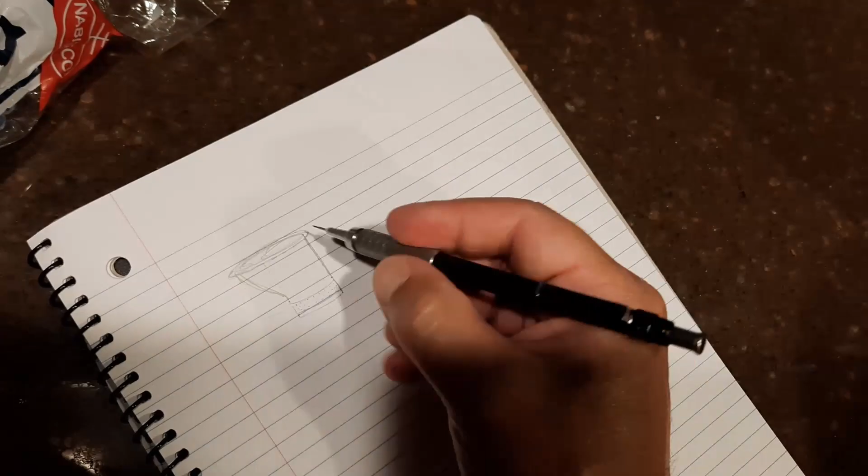First thing I want to do was get an idea of what the actual bowl or the toilet was going to look like. So I started to sketch out kind of how I wanted the shape roughly to be to make sure that everything would be able to funnel into one section.

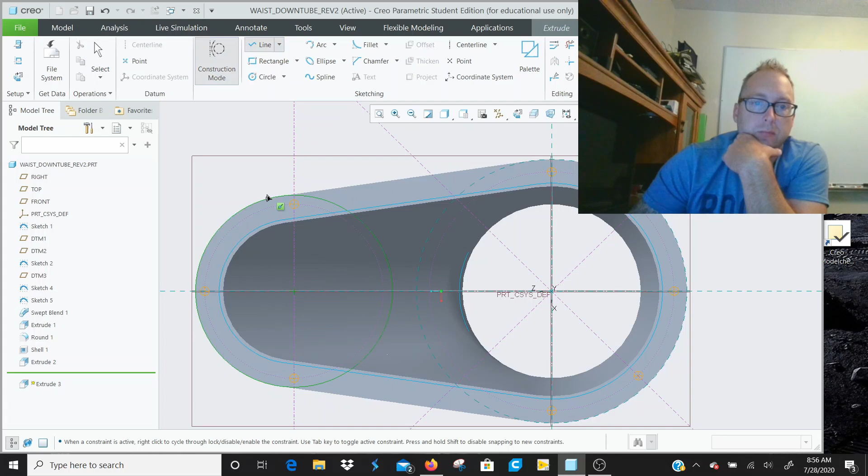So I already modeled the bowl for it, and so I'm going to go through and start laying out some reference lines and points where I'm going to be putting mounting screws to actually mount the bowl onto the main housing, which you're going to see modeling here up next.

So we'll go through, put some chamfers on the bolt holes so the screws can be recessed and everything can be flushed to make sure it all seals. Clean it up a little bit, round off all these edges, just kind of making it look a little prettier.

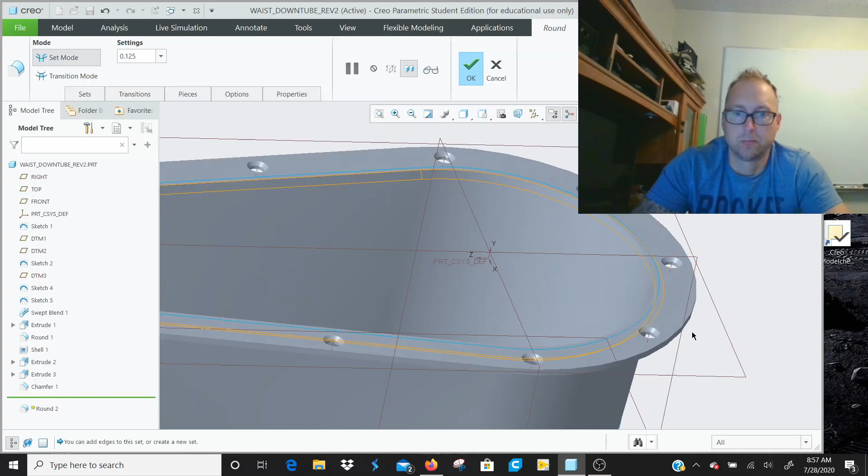Alright, so now I'm going to start on the main body. This is going to be the housing that all the components are pretty much going to sit in.

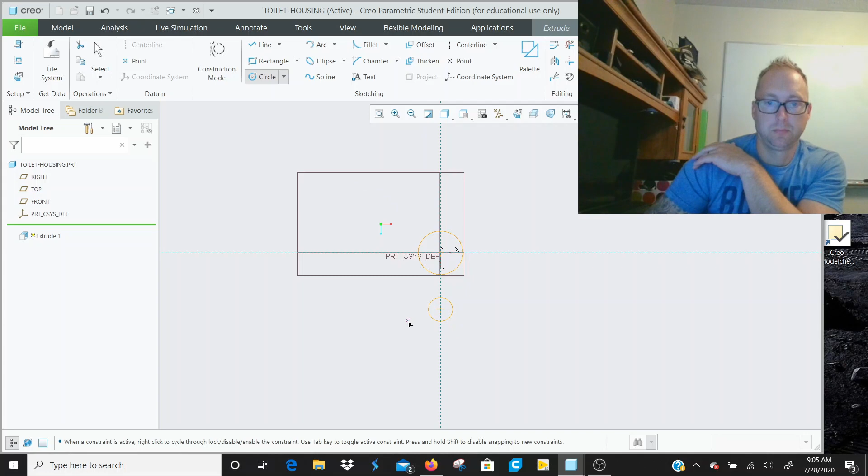So I need to go through, what I'm doing here is laying out what the bowl shape is. And that's going to be where the bowl, what I just modeled up, recesses in and sets into the main body. So once I get that size, I'm going to get all my other dimensions based on that.

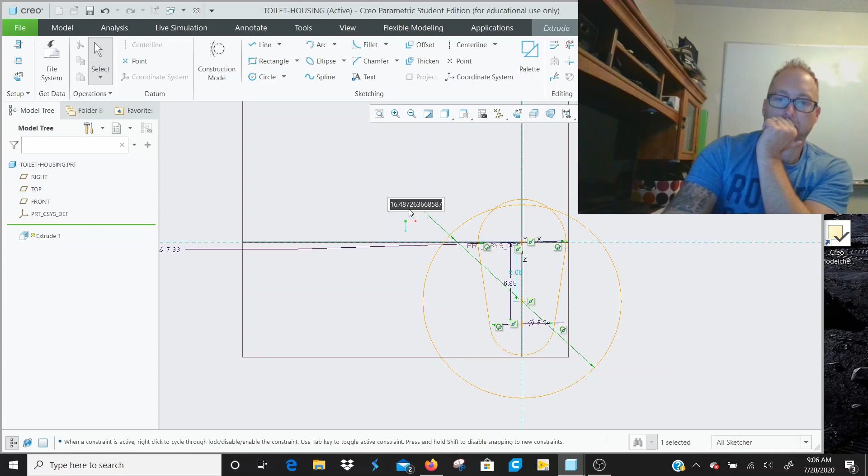To be honest, mainly it's going to mimic a lot of what a normal toilet on Earth looks like. Since we all know that everyone fits on those toilets for the most part, why reinvent the wheel?

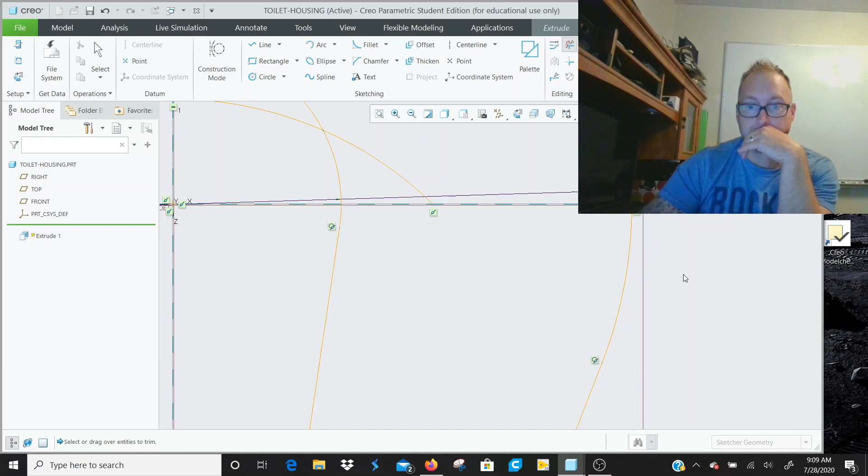So as far as dimensions and how it fits when we sit on it, there's no sense in really changing a whole lot. I did make it a little bit smaller so that I can make sure that I stay within that size requirement. So I went ahead and extruded it out.

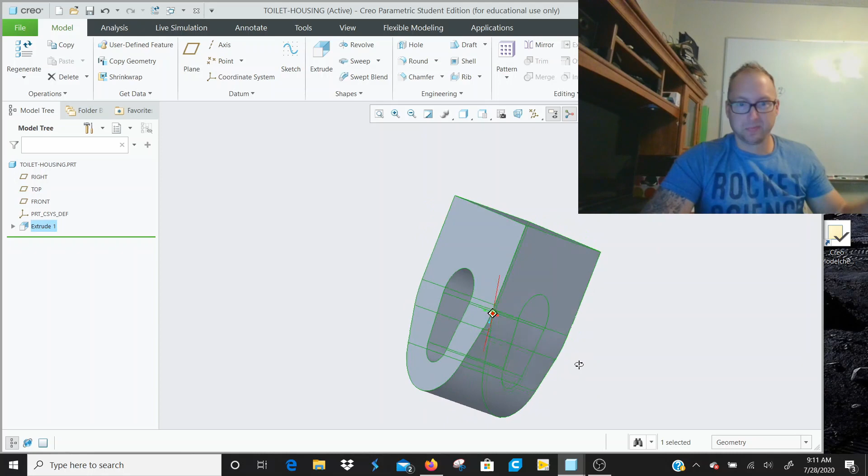What I'm going to do is I'm actually going to go back in and delete that hole that I made in this. And the reason I want to do that is if I go ahead and shell out this whole piece as it is, then I'm going to have a shell all the way down.

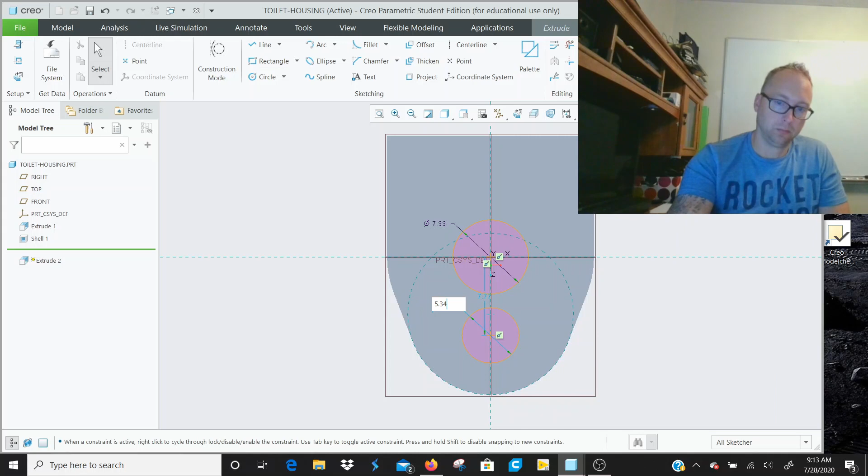So if I delete that, as you can see, I shell it out, and then I have one big opening shell that all my components can sit in. And then I'll go back in and extrude the hole out for the actual bowl.

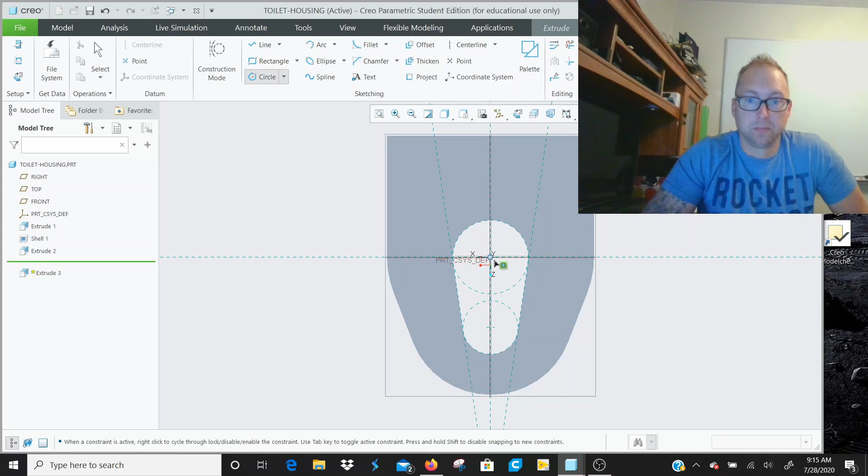Alright, so now that I have the hole for the bowl removed, now I need something to thicken the perimeter of that hole.

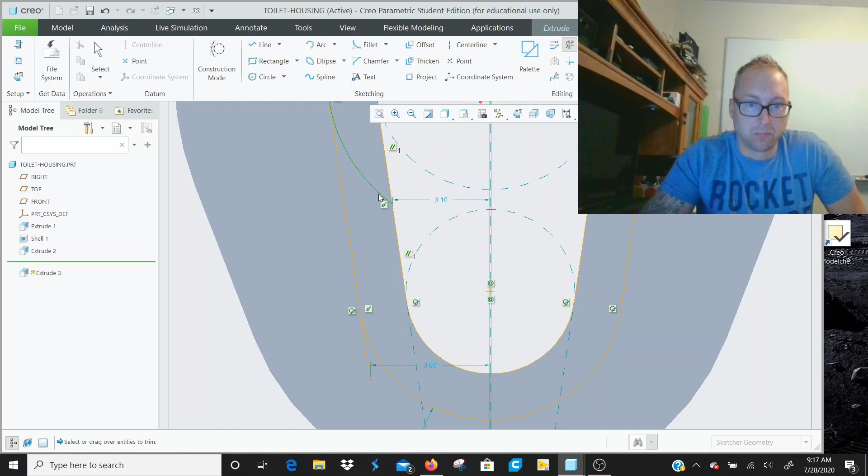And the reason I do that is because I need something a little thicker to allow for screws to thread into. And if I make the whole shell the thickness to where I can actually screw something into and be secure, then I'm going to really add a whole lot of weight onto this part that I don't need to have there.

So by thinning out the whole shell and then adding just the thick section, it's going to really improve the strength, improve the thread engagement. This way I don't have to add a whole bunch of weight.

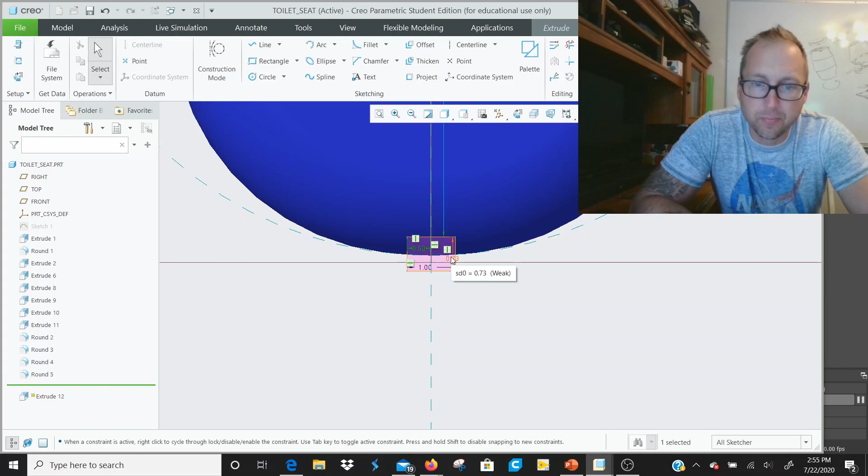And I already have the seat modeled, I didn't show that, sorry about that. But what I'm doing here is I'm going in and putting a latch holder onto it.

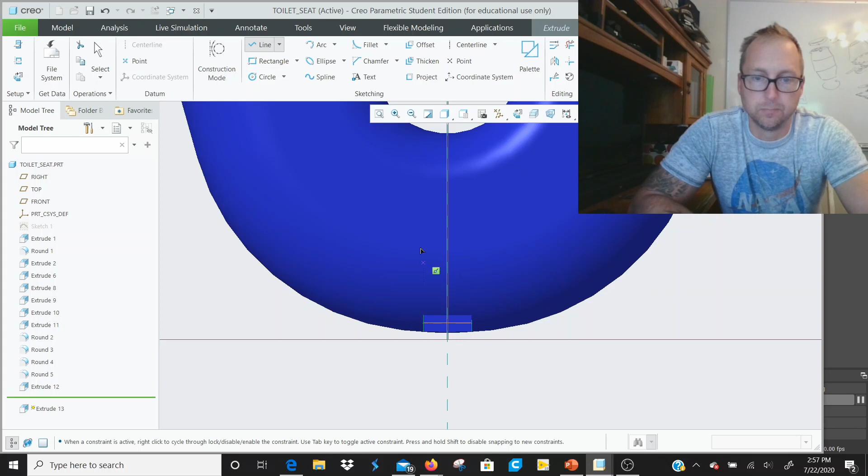So the idea is that when the back is hinged and you fold it down, you can latch it shut. So it seals everything in, because when you flip the lid up, you're going to have access to the filters, the fan. You can remove pretty much most of the components just by flipping one latch.

And that's going to really save a whole lot of time if there ever is a point to where an astronaut actually needs to service or maintain it.

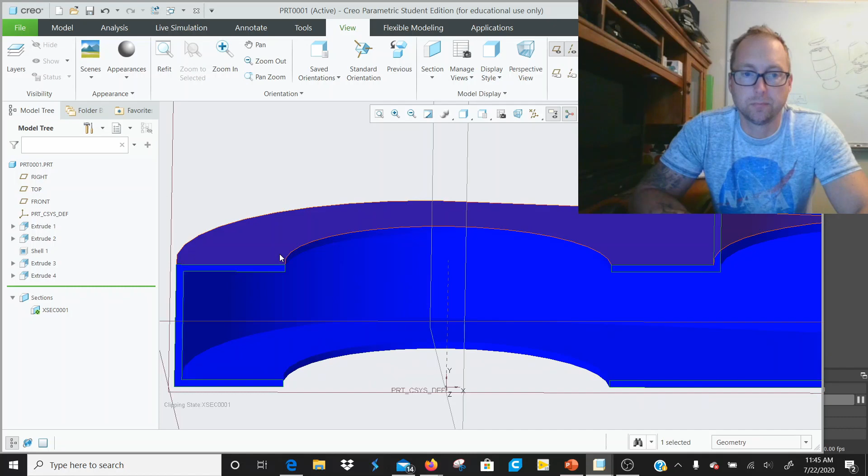I already got the basic model of this fan ducting. This is going to be the part that actually pulls the air through and circulates it, and it's going to hook up to the fan in the back.

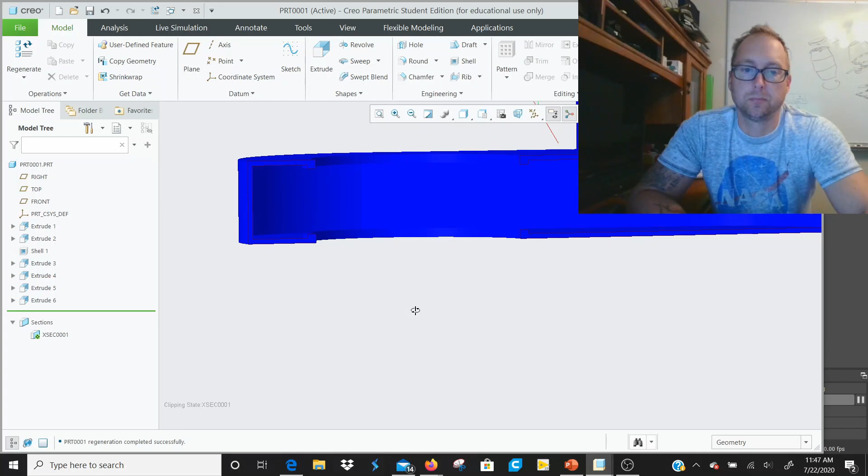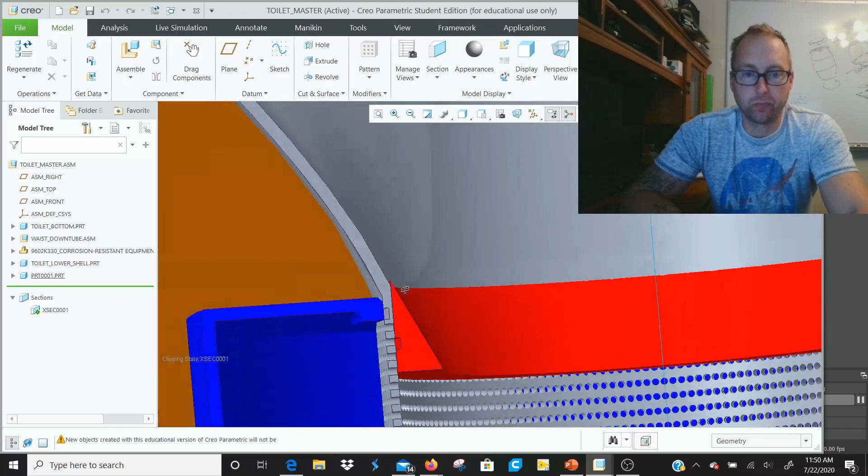Same way I added that thicker rib on the housing, I'm going around here and adding a thicker rib where the bowl slides through. The reason is, as you'll see in the assembly, the bowl's actually going to have O-rings, and right there it is.

I need these O-rings to seal right at those points, because I need the fan and the whole air system to be airtight. I only want to pull air from where I want it to pull it. So here are these O-ring ribs, and they're going to have O-rings that sit in there.

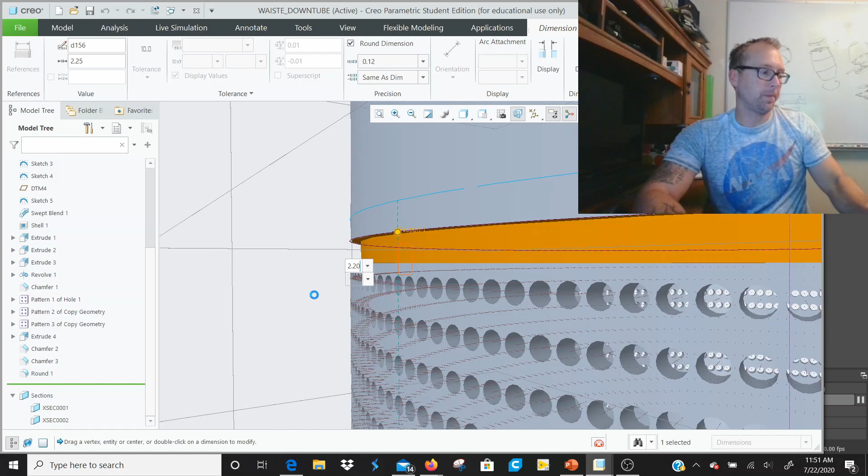You can see the perforated section in the bowl. It took forever to render all those holes, so that's why I kind of cut it off early.

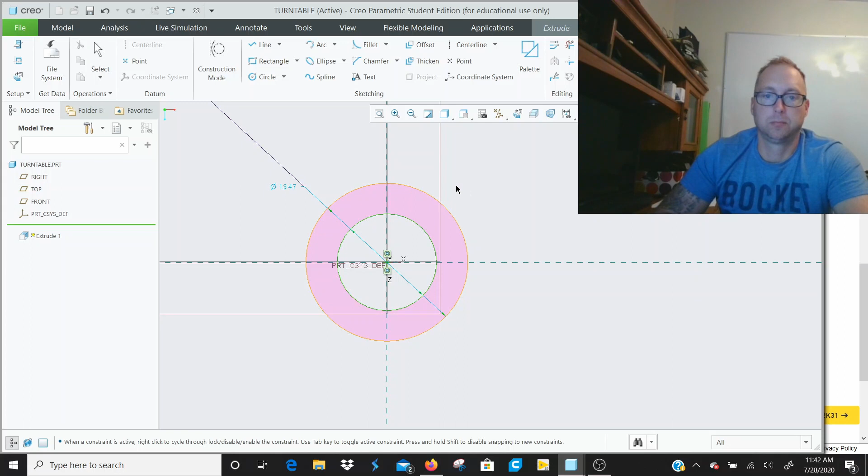So this is kind of the second revision of this design. It's the same thing, but I wanted to provide more than one way to achieve the airflow, so I moved where the intake ducting is for the air.

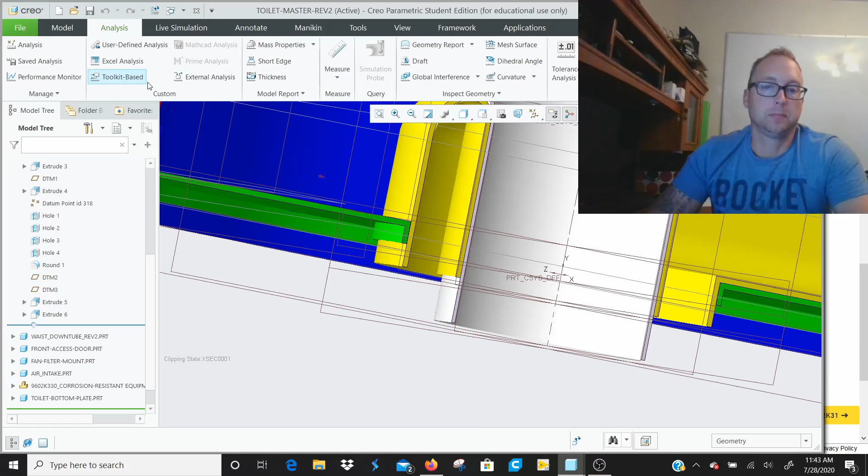So I'm going in, and this is going to be the turntable. The idea is that I'm going to create a centrifugal force to kind of hold everything into a storage tank. And this is going to be the turntable, or the bearing.

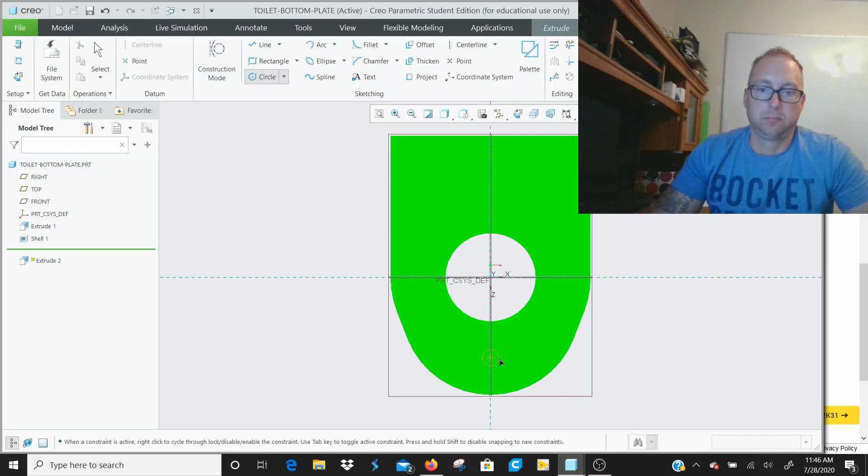I'm not going to go ahead and model a complete bearing, it's kind of a waste of time. But if I put stuff in a form that mimics or shows that there's a component there, then I can go ahead and layer everything else on top of that.

To be able to mount the electric motor in that's going to drive the turntable, there's going to be an access port you can see there on the red, and that's going to allow the astronaut access to that motor if anything would ever happen to it.

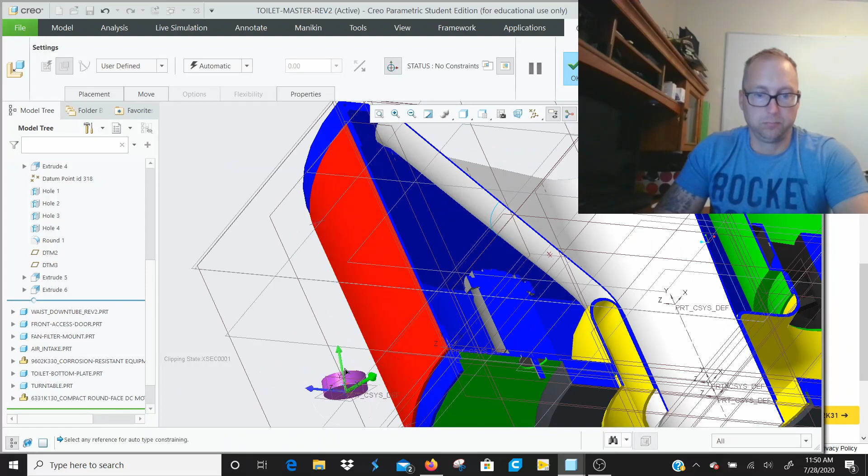Again, it goes back to that ease of maintaining. You don't want to have them take hours and hours to be able to service these if something goes wrong. So it's going to be gear driven.

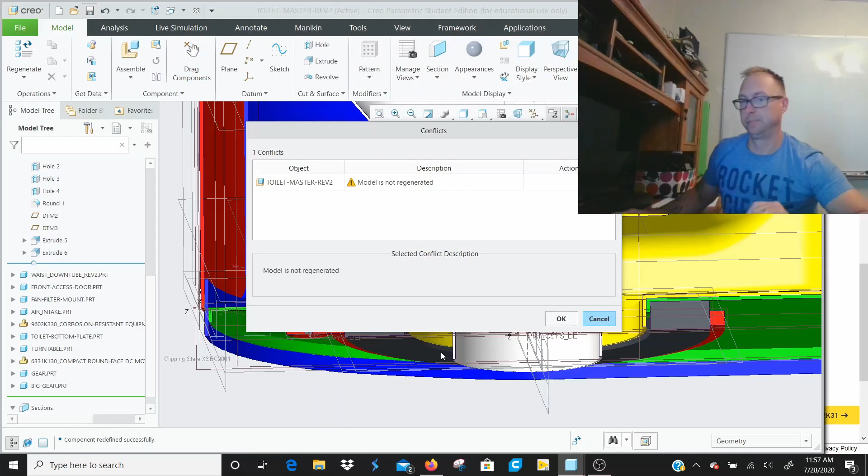As you can see, the red gears - yes, they're not actual gears, but I don't have to model an exact gear. So these are representing what the gears will look like.

Here's where I stand on the space toilet. Or maybe here's where I sit, because you sit on the toilet, right?

All the submission paperwork is complete. The design is complete, to the best I can do in the 30 days. Actually, it was all completed in 20 days from start to submission. I think that's pretty good.

I hope you liked the design process. Now, I know I haven't exactly shown you the actual model design and explained everything to you in detail yet, but the contest, from when I'm making this video, still technically has 11 days left to submit your design.

So what I'm going to do is wait until the deadline, just to protect myself so that no one takes my ideas and submits them for their own. I'll wait until the submission deadline, and then make a video that walks you through the whole design, how it works, what it looks like, and then we'll be finishing up and moving on to the next challenge.